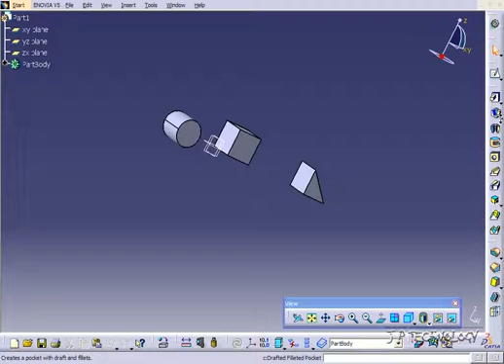To find the multi-pocket, it's either on the toolbar, or you can find it by going to Insert, Sketch-Based Features, Multi-Pocket. The multi-pocket works just like the multi-pad from the last tutorial: you're able to create one sketch with multiple closed profiles, and from those profiles use the pocket to cut into an object at different lengths and heights.

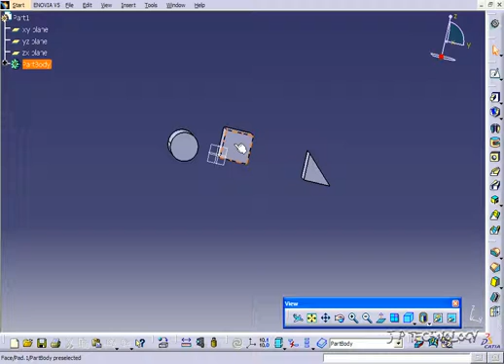Let's click the face of the square, click Sketch, zoom in, and draw a bunch of little squares on the face. Now we've got 3. Let's check our sketch tools with sketch analysis, and you can see you've got 3 closed profiles that you're able to either cut or extrude with.

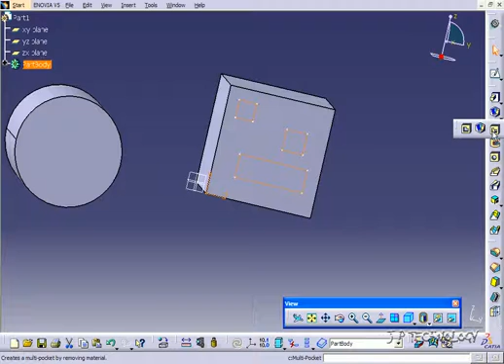Let's close this and go back to our workbench, and use the multi-pocket. We're going to cut into this part at different heights. Let's click the first one, and you'll see it highlighted in blue. Let's cut this one all the way through, type in 100, click preview, and if you rotate it around you can see it's gone all the way through.

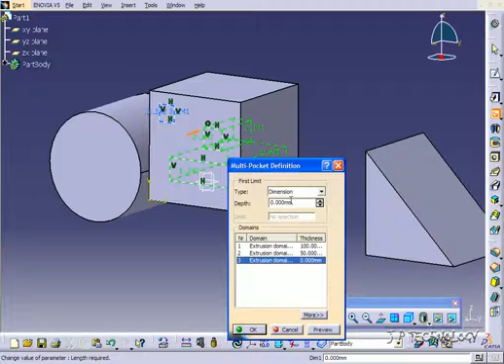Let's click this one and make it 50, and this one we'll make it 20. Now we'll click OK, and if we look through you can see we have 3 different cuts at different lengths from the one original sketch.

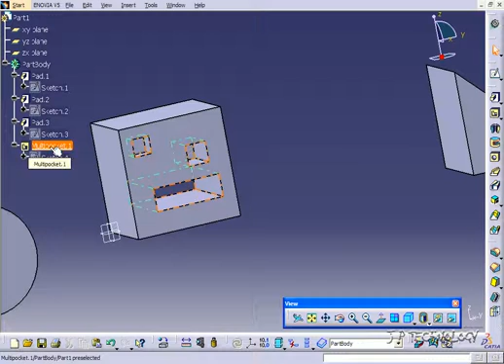If we open the part body, we can see we have the one multi-pocket, and if we double click on it, we're able to change the dimensions. Let's click this 100 one and put it to 50. Click OK, and now it's only at 50, halfway through.

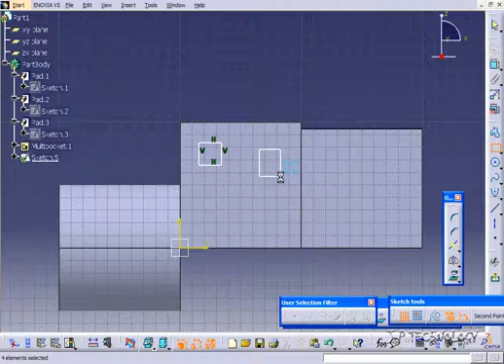Now let's click this face, click sketch, and draw a bunch of other little squares. Let's go back up, and now they're in plane with this face. Let's click the multi-pocket again.

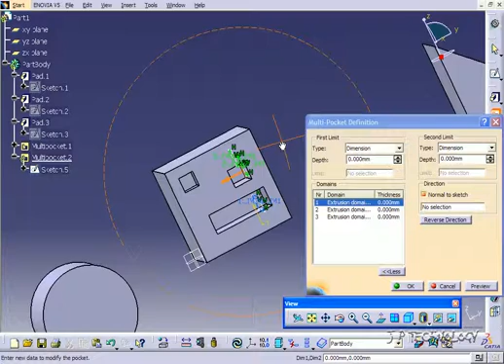This time let's click more. For each one we choose, we're able to choose how far it cuts either way. Right now we have the one in blue highlighted, so we'll change this to 50 and put this one to 10. If we click preview, you can see this one is going to go from that plane, 50 that way, 10 that way.

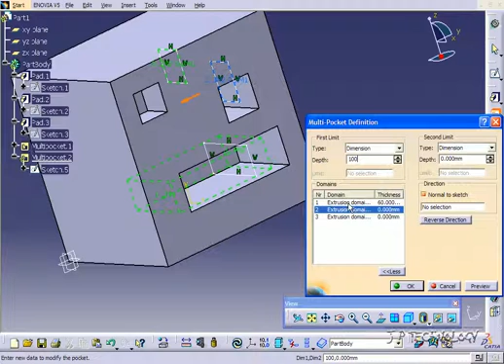Now let's choose the second one and make it go 100, so it's going to cut all the way through. The other one we'll make go 50, but cutting in the other direction all the way through. So you can see from this multi-pocket, we're able to cut both ways, one way or the other, all at once. You get a large degree of freedom when trying to cut, say, from the middle of an object out.

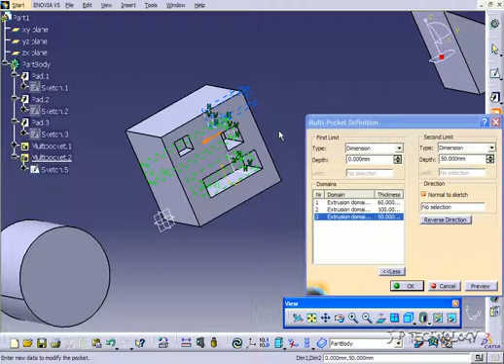So let's click OK. And you can see how we cut through that way, and this one's cut down the middle.

Let's click the circle and make 3 circles inside of it. Let's click one circle there, one circle there, and make one closer to the edge that's outside.

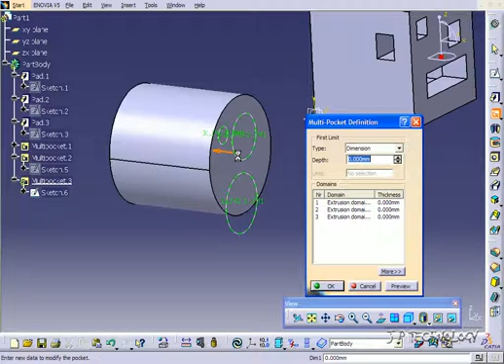Now let's go out and click the multi-pocket, and make some more pockets again. Let's choose number 1 and make it 50. Number 2 we'll make 30, and number 3 we'll make 100. Click OK. And what happened to number 1?

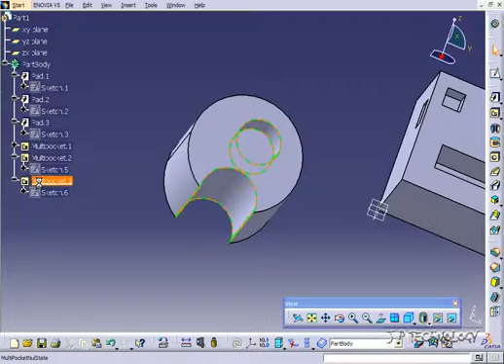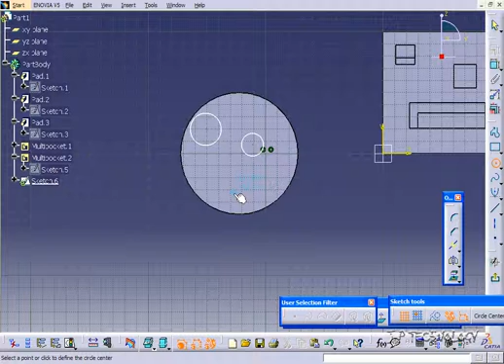We'll click on the circle and make some circles on the face, just 3 circles anywhere on this face. I'm going to pull one that's out a little bit too. Let's go back to the workbench and click pocket, the multi-pocket, and cut all three of these.

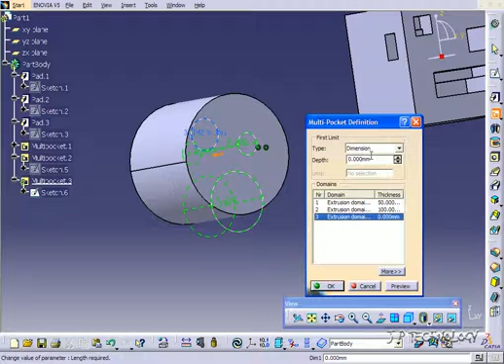For number 1, let's make it 50. For number 2, let's make it 100. And number 3, let's make it 30. Now let's click preview, and you can see where all of these are going. Click OK. And again, we've done 3 cuts from the one sketch.

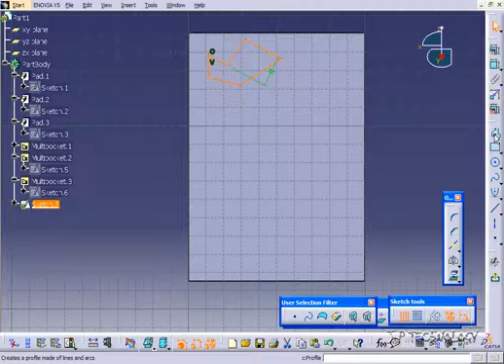Now let's click on this face, click sketch. Let's zoom in and make 3 unique profiles, and 1 more profile. Now you can see that this one up here isn't completely closed.

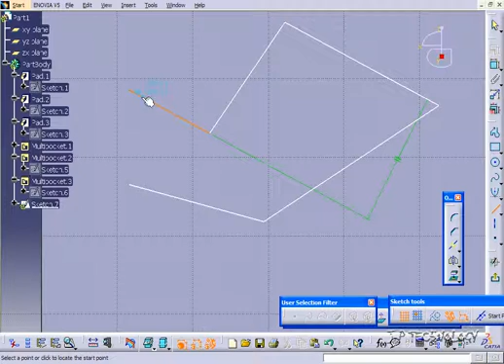If we go to our sketch tools and click sketch analysis, it's going to show we have a problem with it. So let's close this and just change this, delete this line here, and close it up. Again, it's very important to use the sketch analysis tool to make sure everything's closed. We'll check one more time: sketch analysis, everything's closed.

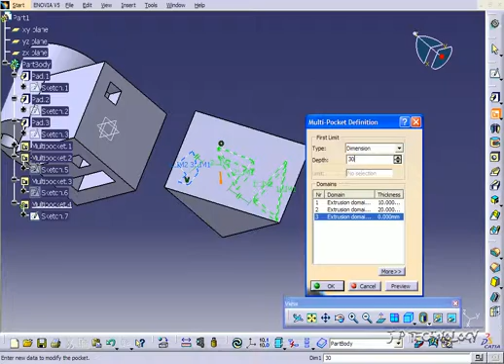Now let's go back up to the workbench and use the multi-pocket again. We'll do 10 for the first one, the second one we'll make 20, and the third will make 30. Click OK. And now we've made our 3 cuts again with the multi-pocket into the part.

Again, just like the multi-pad, the multi-pocket allows you to save some time, as from one sketch you're able to cut out multiple profiles. So you can go from 2 up to whatever, say 100 profiles, and use just one sketch and one feature to extract and cut out all those different profiles. This tool is potentially a very big time saver.

And this concludes our tutorial on how to use the multi-pocket feature within CATIA V5.